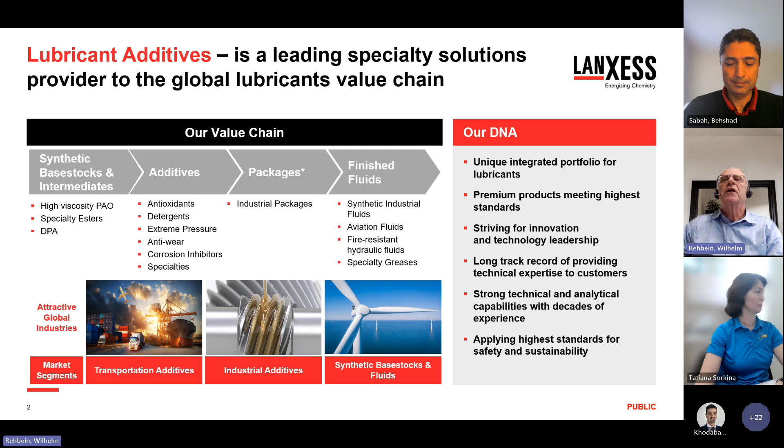These include finished fluids for aviation, fire-resistant hydraulic fluids, and special calcium sulfonate complex greases. All these premium products meet the highest standards, and there's also excellent technical support for customers.

So the plan of Lanxess as an entire company is to become climate neutral in its Scope 1 and Scope 2 emissions by 2040. Actually, these emissions have already been reduced by more than 60% compared to 2004. It is also planned to reduce the Scope 3 emissions continuously and to become net zero in that by 2050.

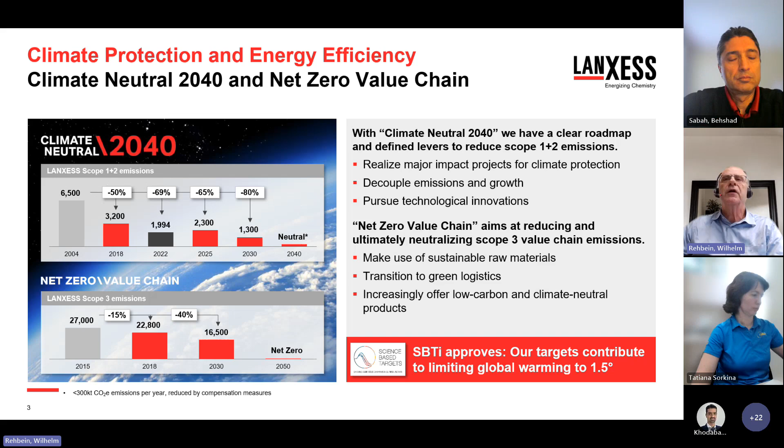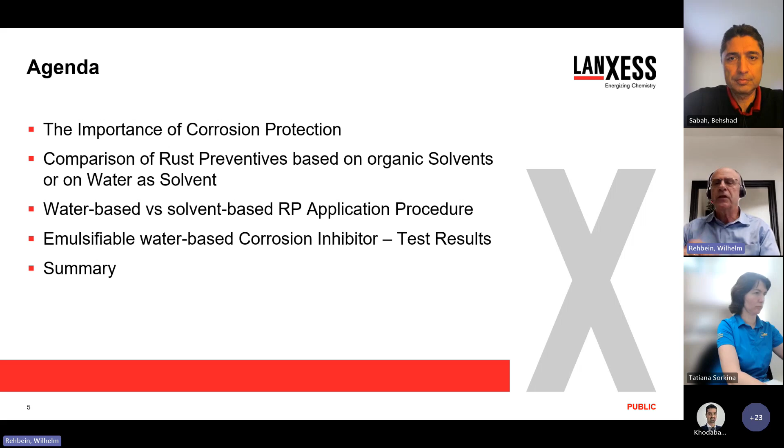So far for the introduction. I will now go to my first presentation, which has the title: Rust Preventives Based on Water as Solvent - Challenges and Advantages. I will start with an explanation of the importance of corrosion protection, then compare the advantages and disadvantages of using organic solvents versus just water as a solvent for rust preventives. This is followed by a description of the application procedures of both types of RPs, and I will also show the test results of an emulsifiable water-based corrosion inhibitor. Finally, I will come to a summary.

Corrosion protection is a quite important topic because corrosion actually generates more damage than fatigue. There's a study from 2016 that estimates the annual global cost of corrosion at approximately 2.5 trillion US dollars, which is approximately 3.4% of the global gross domestic product. According to another study, the direct costs of damage caused by corrosion just in the US were 276 billion US dollars in 2006.

And these are only the direct costs. Indirect costs, like loss of productivity, downtime of production facilities, and so on, are at least as high as the direct costs. So within the last 3 to 4 decades, supply chains became more complex, transport routes became longer, and transport volumes increased drastically.

Particularly for the manufacturing industry, corrosion during transport or storage of semi-finished parts like bars, slugs, or blanks, and of finished parts, has become a real challenge. Corrosion occurs due to bad weather conditions or changing climates during overland transport, but also by seawater impact during maritime transportation, or just by high-humidity storage conditions. The temporary corrosion protection of parts during transportation or storage is the typical application of rust preventives.

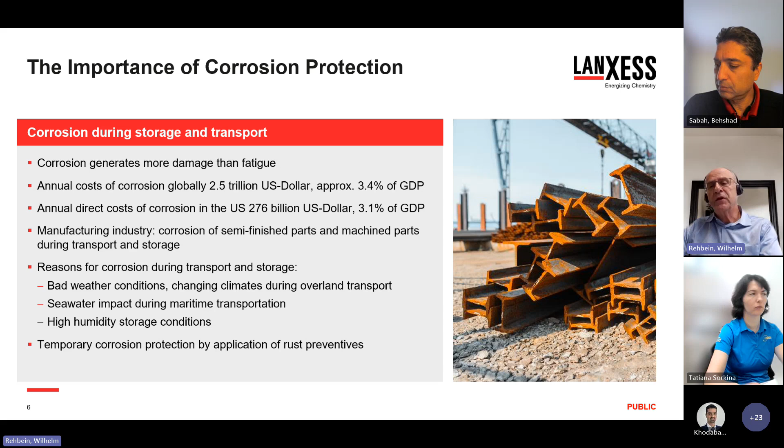Many rust preventives were in the past, and still are, based on organic solvents. This technique is quite common since long times. Advantages are: the application of this kind of rust preventive is a very established process, and drying times are usually short.

After removal, the rust preventives are very easy to dispose. They can just be burned. And the formulations are not very complex.

But these organic solvents, like white spirits, are volatile organic compounds, so-called VOCs. They act as a greenhouse gas and contribute to global warming. In reaction with nitric oxides and sunlight, they form ground-level ozone, which is a harmful air pollutant. And many VOCs are harmful by themselves and can cause health issues for the workers.

There are already restrictions for the use or emission of VOCs in many countries, like the US, Canada, the European Union, Australia, or Japan. So it's necessary to install an exhaust gas treatment like an afterburning system to eliminate the emitted solvent vapors.

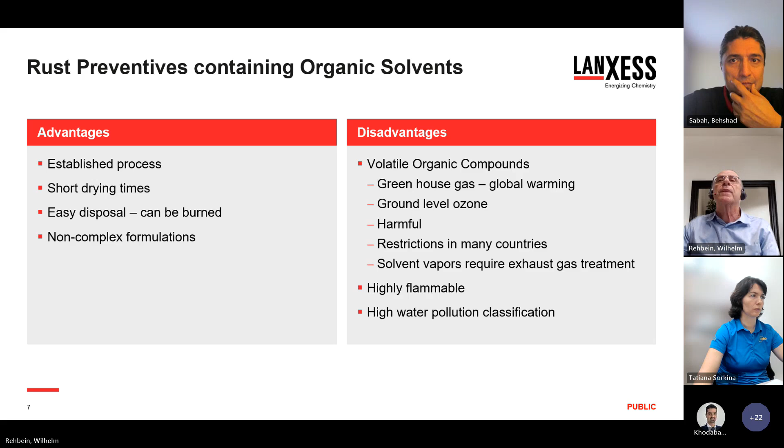But what if just using water as a solvent? There would be no VOC release because there are simply no volatile organic compounds in the formulation, and therefore also no exhaust gas treatment necessary.

The formulation, the rust preventive, would be not flammable, and usually it would have a lower water pollution class. The quantity of material that needs to be transported or stored is also lower because 70 to 80% of the finished rust preventive is just water, which is usually available in every manufacturing site. And the disposal is still as easy as for other used lubricants.

On the other hand, drying times might be longer, and because it's a new technology, some changes might be necessary in the application process.

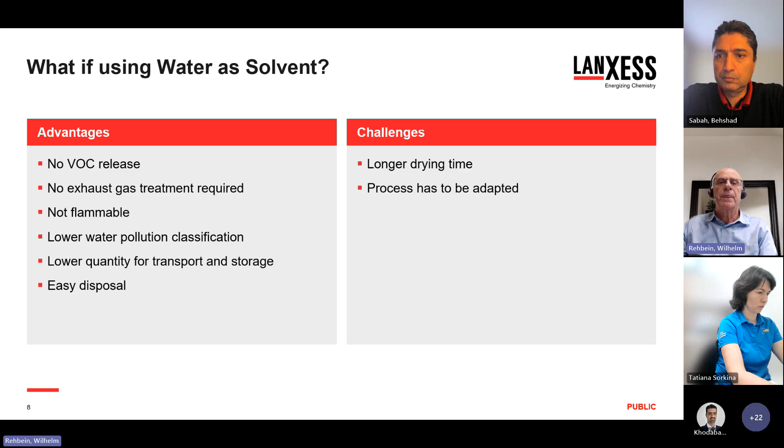This chart is a comparison of the application procedures of solvent-based or water-based rust preventives. It includes all the steps from the manufacturing of the part to the cleaning process, the application of the rust preventive, the transport and storage stage, and the removal of the rust preventive for assembling the part.

As you can see, for the solvent-based technology, there's always an exhaust gas treatment necessary during the cleaning of the parts, the application of the rust preventive, and also when the RP dries on the surface of the parts. With a water-based rust preventive technology, there is no need for an exhaust gas treatment because the only substance that evaporates is water. On the other hand, warming up the parts accelerates the drying process.

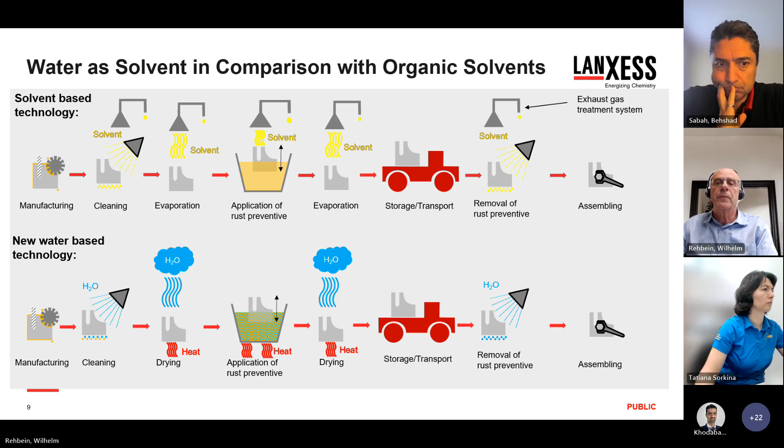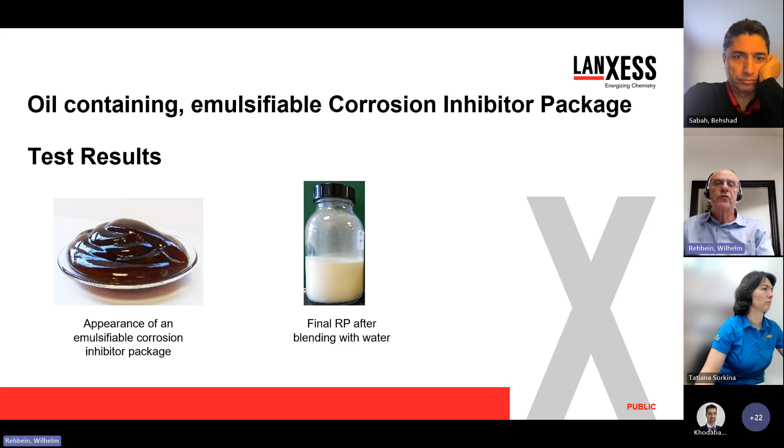The following test results were achieved with a water-based emulsion of a corrosion inhibitor package that we emulsified in a concentration of 10 or 20% in water.

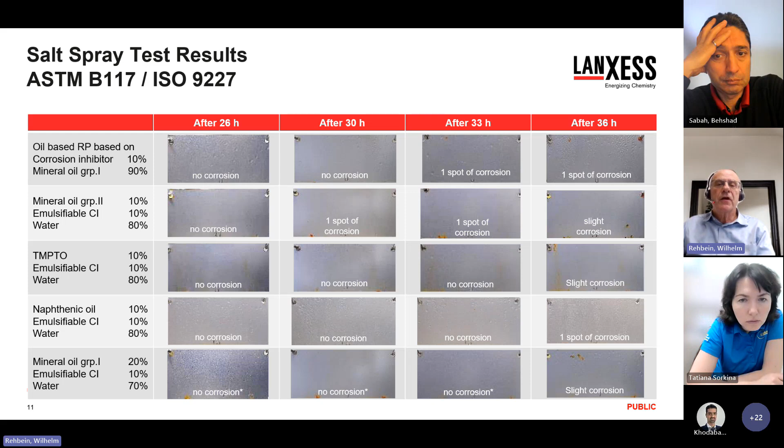All these formulations were diluted in water. And as you can see, the anti-corrosion performance of these water-based emulsions is at least on the same level as the oil-based rust preventive.

Additionally, we tested the emulsifiable corrosion inhibitor in a condensation climate with alternating humidity and air temperature. In this test, which is according to ISO 6270-2, one cycle consists of 8 hours at 40 degrees Celsius and 100% relative humidity, followed by 16 hours at ambient temperature and ambient humidity. So one cycle is finally 1 day.

That test was stopped when the surface of the steel sheets was covered with corrosion at a level of 5%. As you can see, the emulsion of 10% corrosion inhibitor, 10% mineral oil, after drying, lasted on the steel sheets for 178 cycles or days until the corrosion limit of 5% was reached. And with 10% corrosion inhibitor and 20% mineral oil, it took even 220 days until the test was stopped.

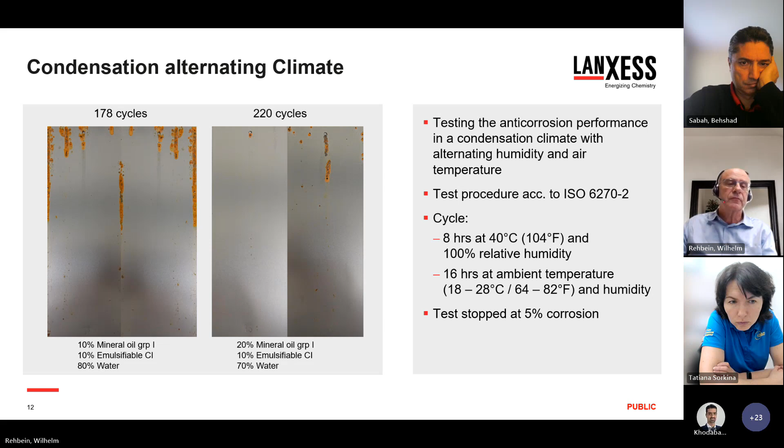Of course, excuse me, just a moment, please.

Of course, the drying time of water is longer than the drying time of organic solvents that have a low flash point. However, we compared the drying time of solvent-based rust preventives with the drying time of the rust preventive emulsion that also contains some siccatives.

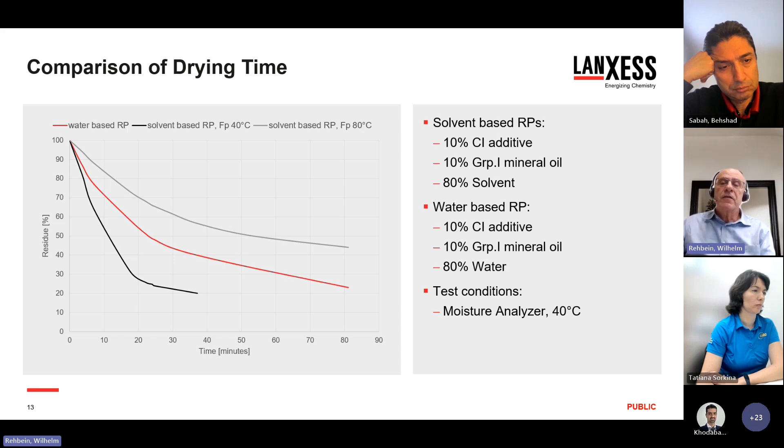Compared to a solvent-based rust preventive with a flash point of 40 degrees, this is the black line, the drying time of the water-based rust preventive, the red line, was significantly longer. But on the other hand, there is the low flash point of the rust preventive, which causes a danger of ignition, just 40 degrees Celsius.

But if we compare the water-based rust preventive with one that is based on solvent, which has a flash point of 80 degrees Celsius, the water-based formulation dries much faster.

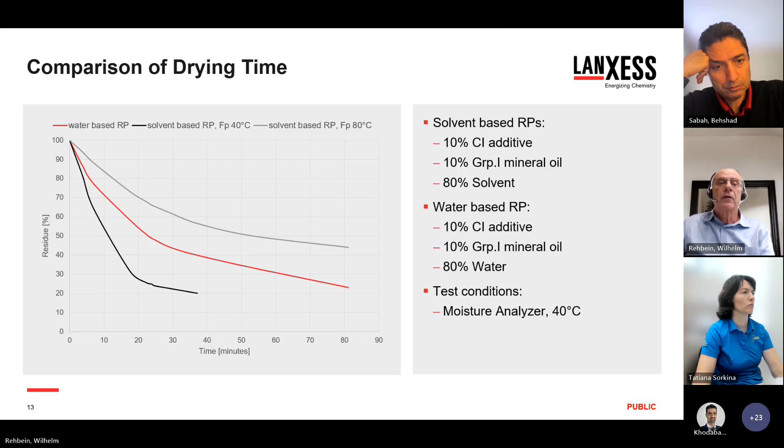After the application of the rust preventive, it's also important that the dried film can be easily removed by suitable cleaners. We tested how easy or difficult the film can be removed by two different types of water-based cleaners: one according to the industrial standard VDA 230-201, and the other a commercially available industrial cleaner for ferrous metals.

The sheets covered with a dry rust preventive film were dipped for 3 minutes in the different cleaner solutions at a temperature of 60 degrees Celsius. After that, we rinsed them with tap water for 30 seconds. For better verification of the cleaning test result, we conditioned the clean steel plates by dipping them into a copper sulfate solution, so all the surface areas on the steel sheets which were perfectly clean were covered with a thin copper coating.

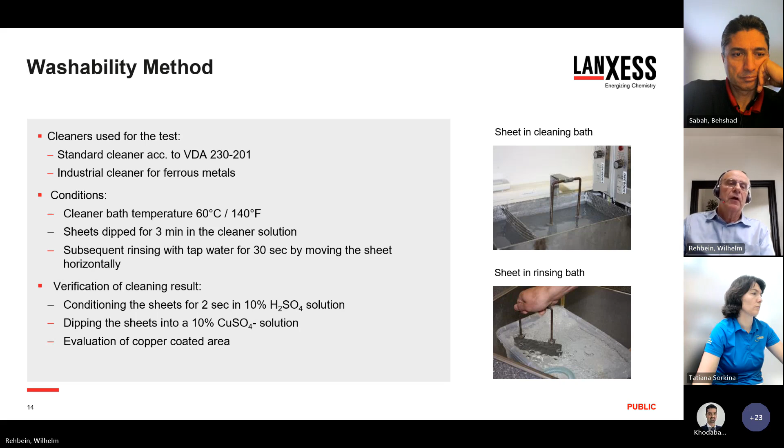As you can see on these photos, with both rust preventive formulations containing 10% corrosion inhibitor and 10 or 20% mineral oil and 80 or 70% water, with the VDA standard cleaner as well as with a conventional cleaner for ferrous metals, the results were excellent, and the clean surface area on the steel sheets was 100%.

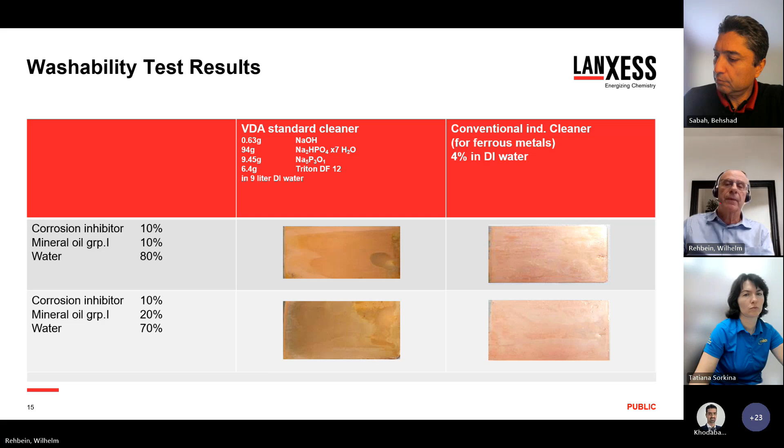So the summary and conclusion for the first presentation: rust preventives based on water can, in our opinion, be a great alternative to meet today's environmental requirements. The new emulsifiable corrosion inhibitor technology offers excellent performance for long-term temporary corrosion protection. There are no emissions of VOCs, and the formulation also works without heavy metals like barium. The formulated rust preventive is not flammable because of its high water content, and the salt spray protection and condensation alternating climate protection times are comparable to oil-based rust preventives.

We also found that the stability of the prepared emulsion is excellent even at high water hardness. And finally, as I could demonstrate, the protective film of this water-based rust preventive is easy to remove using suitable water-based cleaners.

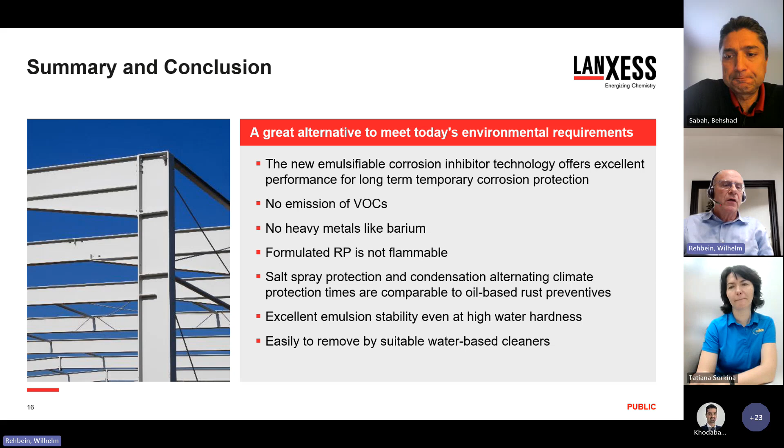I will now come to my second presentation. The title of the second presentation is EP Additives with Improved Sustainability for Heavy Duty Metalworking Processes. So completely different, but I think both topics are somehow related to metalworking.

I will now start with a general introduction into the function of EP additives, followed by detailed information about sulfur carriers and a comparison of the technical and health and safety aspects of sulfur carriers and chlorinated paraffins, both of which work as EP additives for metalworking fluids. In the second part, I will show tribological test results of EP additive containing neat oil metalworking fluid formulations, as well as waterborne formulations. Finally, I will again come to a summary and conclusions.

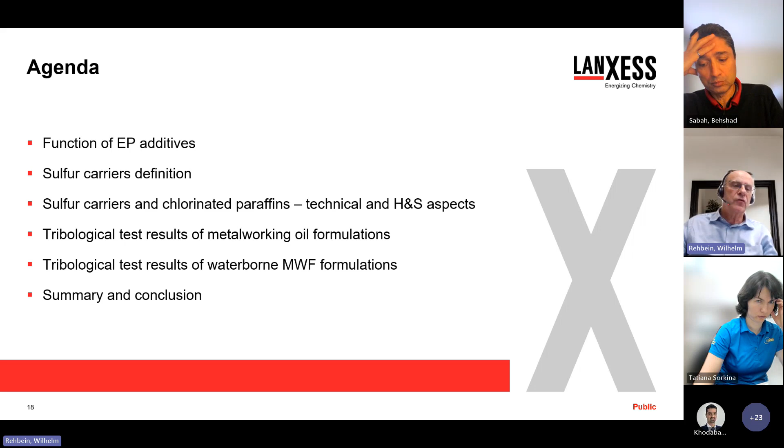Chlorinated paraffins and sulfur carriers are both EP additives that are used in lubricants and metalworking fluids quite commonly to prevent adhesive wear, which is also called galling or cold welding.

But how do EP additives work? According to the common theory, in a first step they physically adsorb on metal surfaces with their polar centers, and by this they are already forming a kind of friction reducing layer. With increased mechanical stress, usually followed by thermal stress, they chemically react with the metal surfaces, forming protective layers that are less shear stable than the metal structure itself, and by this they prevent the metal surfaces from galling or cold welding.

Sulfurized esters and triglycerides undergo a kind of intermediate step of so-called chemisorption, in which they also work as lubricity and anti-wear additives.

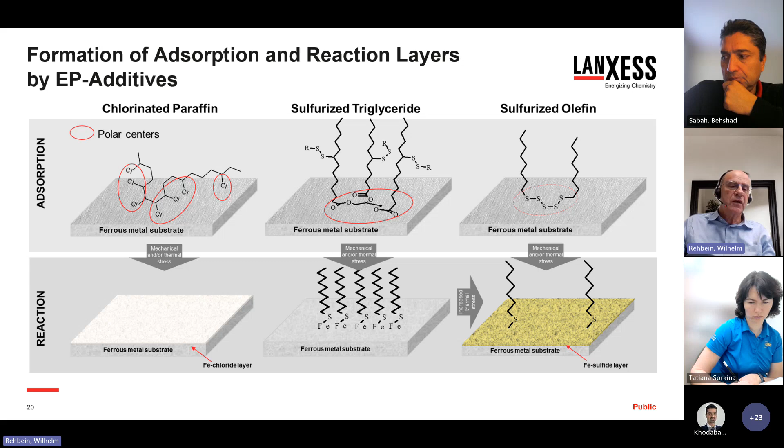So what are sulfur carriers? Sulfur carriers are sulfur-containing organic compounds made from unsaturated raw materials like olefins or unsaturated natural oils or synthetic esters. They contain 2 to 5 sulfur atoms, forming a kind of connection or chain or bridge between the olefin or ester parts of the molecules.

They have polar centers, as I already showed on the previous slide, and with these polar centers, which can be oxygen atoms or the sulfur atoms itself, they can physically adsorb on metal surfaces. By this, they make sulfur oil soluble and able to form protective layers, which protect metal surfaces from adhesive wear or galling. So they work perfectly as EP additives in metalworking processes and are excellent replacements for chlorinated paraffins.

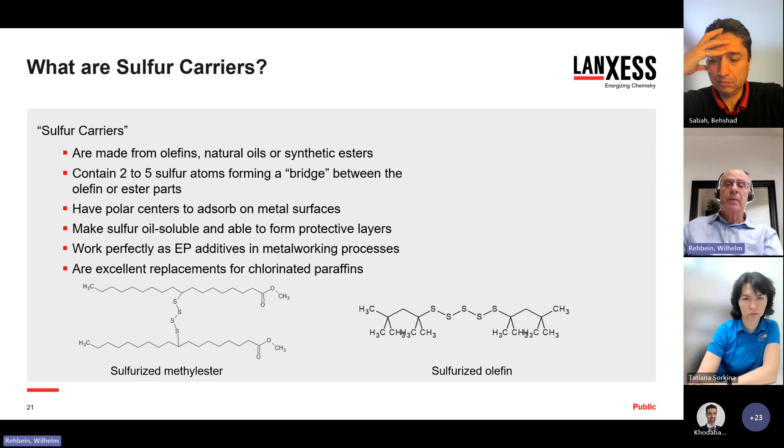This is how sulfur carriers are produced. Raw materials for the sulfurization process are vegetable oils like soybean, canola, or sunflower, respectively their methyl esters, but also animal fats or oils like beef tallow or lard can be used, or olefins from crude oil refining are also suitable raw materials for the sulfur carriers.

In a reaction vessel, sulfur and H2S are added, as well as catalysts and stabilizers, and the reaction products are sulfur carriers of light color and low odor.

Can you still see my presentation? I got one comment from Yusuf that he cannot, but I can. Everybody can see the presentation? Ayman, do you see that? Yeah, okay, okay, great. Okay, cool. Okay, so I can continue.

So I will now come to a comparison of the technical aspects of chlorinated paraffins and sulfur carriers. Chlorinated paraffins are definitely effective EP additives at low machining speeds.

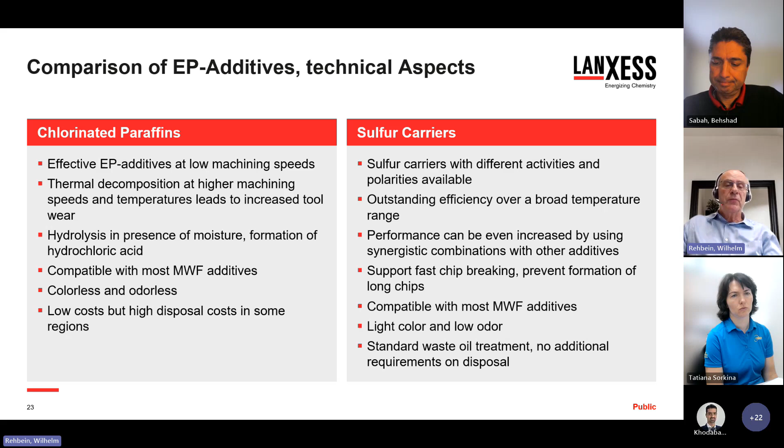Coming to the health and safety aspects, the short-chain chlorinated paraffins are already banned in many countries because they are persistent in the environment, they are bioaccumulative, and suspected to cause cancer.

There are intentions to ban or restrict the use of medium-chain chlorinated paraffins, the so-called MCCPs, for example by the European Chemicals Agency, the Japanese and South Korean Ministries of Environment, and by the United Nations Environment Programme, the so-called Stockholm Convention.

As far as we understand, there have also been discussions about a ban of medium and long chain chlorinated paraffins in the United States, and according to our information, these discussions are still ongoing.

Finally, chlorinated paraffins are categorized according to the Globally Harmonized System of Classification and Labeling of Chemicals as very toxic to aquatic life with long-lasting effects.

Sulfur carriers, on the other hand, do not show any kind of hazard classification, and many sulfur carriers are based on renewable raw materials like vegetable oils. Some are already 100% biodegradable and absolutely non-toxic to aquatic organisms.

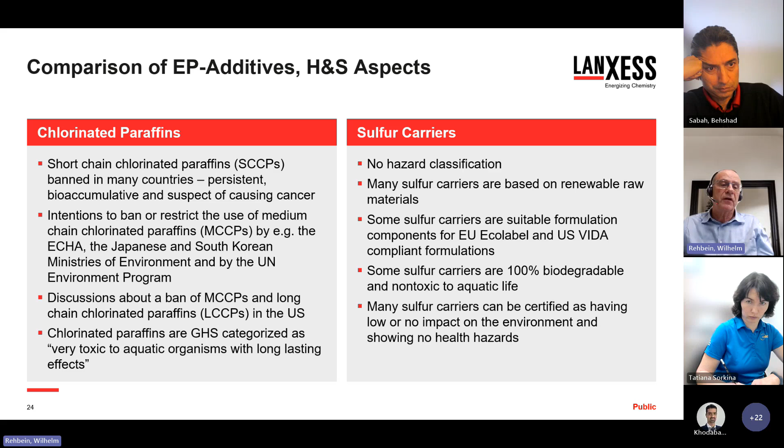Now I will come to some tribological test results, first with the neat oil formulations. We use the tapping torque test to evaluate the performance of the different EP additives. This test uses a real thread cutting or thread forming process in which the torque is recorded and used for the evaluation of the different metalworking fluid formulations.

It can be done with many different workpiece materials and also different tools. The test results are very well transferable to other cutting or forming processes. So the torque is recorded and used for the evaluation of the tested formulations. That means a lower torque indicates lower energy consumption in the process, and also results in lower tool wear.

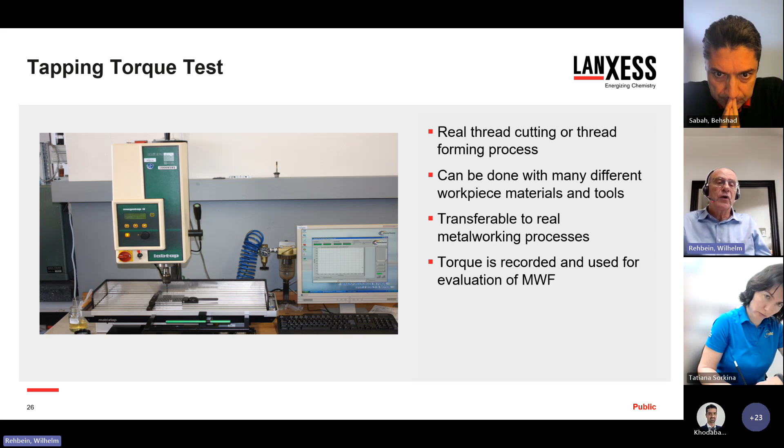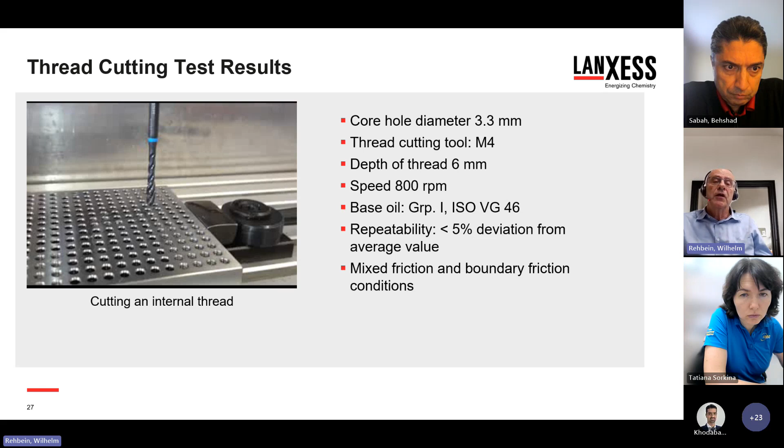I would like to start with our thread cutting test results. We used parameters like the diameter of the core holes, which was always 3.3 millimeters. We used an M4 thread cutting tool. The depth of the thread was 6 millimeters. The speed was 800 RPM, and we always used the Group 1 ISO VG 46 base oil for our tests.

First of all, we did the thread cutting in AISI 316 stainless steel, because contrary to normal steel, the surface of stainless steel is nearly completely covered with metal oxides, which makes it quite difficult for EP additives to interact with this surface, and it's also difficult for metalworking fluids to perform well with stainless steels.

We first used a non-coated tool for the thread cutting process. So we started with running the test with different sulfurized triglycerides with similar chemical structure and similar viscosity to evaluate the influence of the sulfur content and the sulfur activity, which is actually quite high.

As you can see, with 10% of the inactive sulfurized triglyceride, adhesion, respectively cold welding, was detected at a depth of approximately 3.5 millimeters.

With 10% of a medium active sulfurized triglyceride with nearly the same kinematic viscosity, torque was lower, but there was still a tendency for material adhesion towards the end of the cut. Only with the active sulfurized triglyceride was the cut performed without any adhesion effect and with a comparatively low torque.

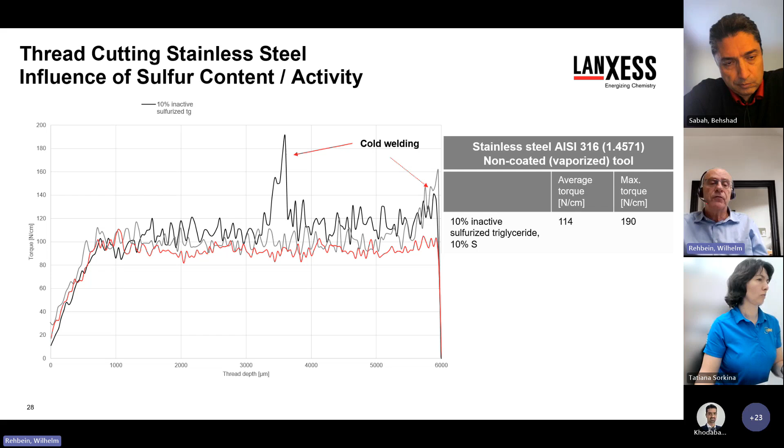Because the highly active sulfurized triglyceride showed the lowest torque, we additionally tested a sulfurized ester with almost similar sulfur content but lower kinematic viscosity, and as you can see, in this test with stainless steel, there was no significant difference.

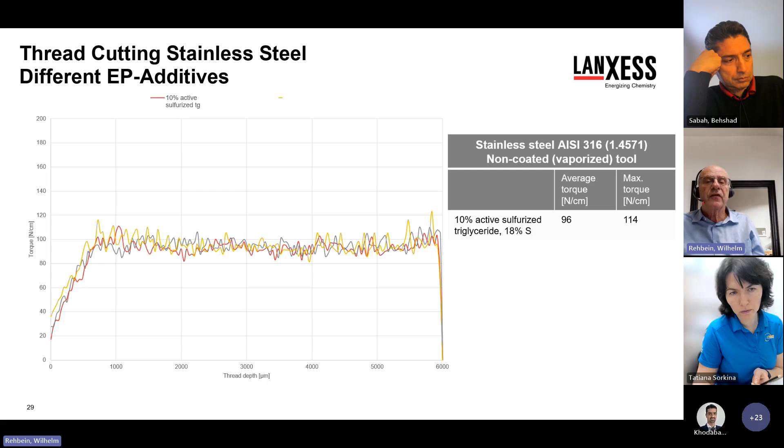We also tested a formulation containing 10% of a medium chain chlorinated paraffin, which contained 50% chlorine. When we compare the torque of the chlorinated paraffin containing formulation with the sulfur-based EP additives, we see that the average torque is quite similar. But the torque curves of the sulfur carriers are smoother and with fewer peaks in the records than for the chlorinated paraffin.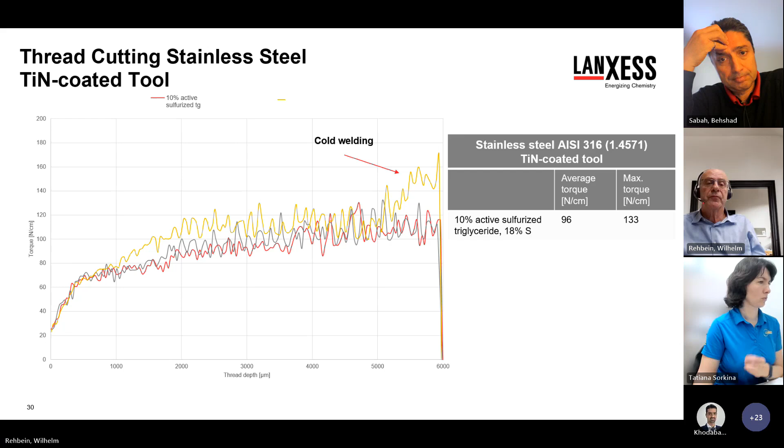Additionally, we did some thread forming tests. In thread forming, the internal structure of the metal is not destroyed or cut, but just deformed. The material is compressed to the walls of the thread, so no chips are produced. Formed threads typically have a higher fatigue strength and are more durable than threads produced by cutting.

In this test series, the core hole diameter was 3.7 millimeter. It was also an M4 cutting tool, but it was titanium aluminum nitride coated. The depth of the thread was 8 millimeter. The machining speed, again, was 800 RPM, and we used the same base oil as for the thread cutting tests.

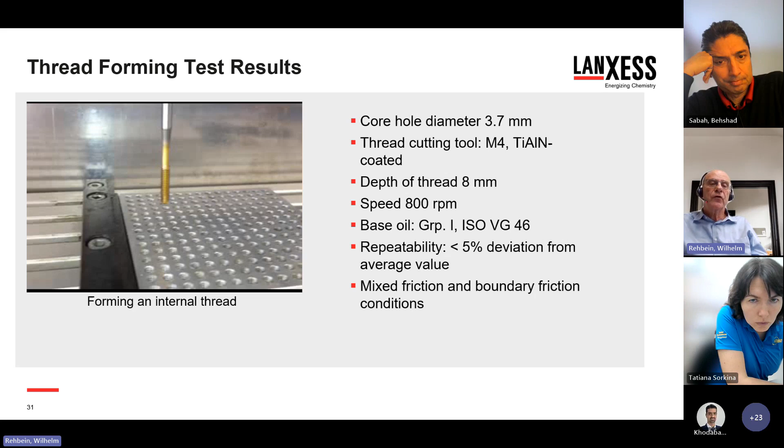So again, we started with stainless steel and with a 10% medium chain chlorinated paraffin formulation. Compared with this formulation, the formulation containing 10% sulfurized ester showed a slightly lower average torque, but a higher maximum torque. This is probably caused by the lower viscosity and the lower lubricity of the sulfurized ester. But then we ran the test with 10% of the active sulfurized triglyceride, and due to the higher polarity of its molecular structure, the torque was significantly lower, and also much lower than for the chlorinated paraffin.

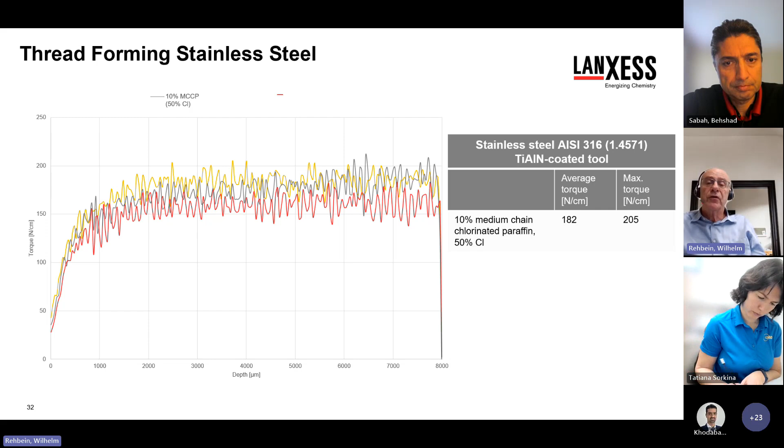We did the thread forming also in S960QL high strength steel. The yield strength and tensile strength of S960QL are similar to ultra high strength steels that are commonly used in the car industry, so therefore they are quite difficult to machine by forming processes.

When running the test with this steel, the medium chain chlorinated paraffin showed a comparatively high torque, and the curve, as you can see, is quite uneven. With the sulfurized ester, and even more with the sulfurized triglyceride at the same treat rate, the torques are much lower, which means the forming process will be less energy consuming and also cause lower tool wear.

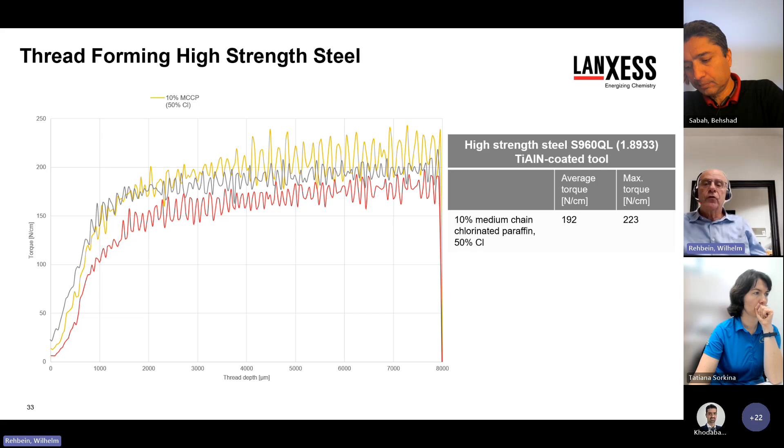But because the tapping torque test does not give a direct indication about tool wear, we additionally used the 4-ball wear test to evaluate the influence of the EP additives on wear in this kind of mixed lubrication regime. We ran the test with the standard ball bearing steel, as well as with stainless steel balls. The test parameters were according to ASTM D4172B, but also according to DIN 51350-3.

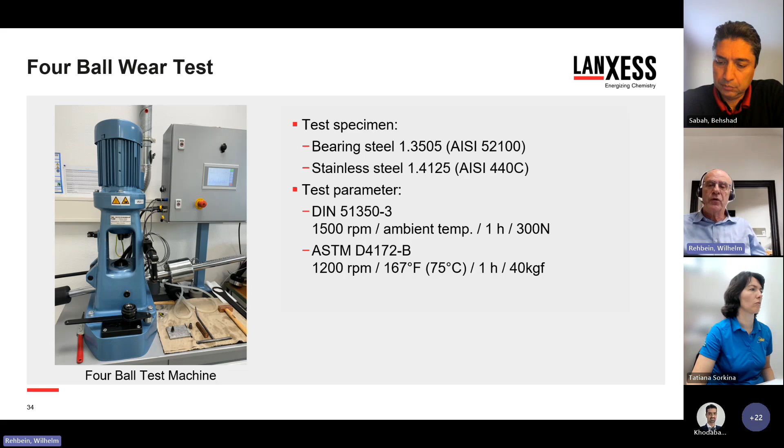When running the test according to the DIN standard, we found the lowest wear scar diameter on bearing steel with the inactive sulfurized triglyceride, which is 0.72. With the more active sulfur carriers, the wear scar diameter was slightly higher, larger.

With stainless steel, the gray bars, the effect was reversed, so the wear was reduced with increasing sulfur and active sulfur concentration. But in any case, the wear was significantly lower when compared to 10% or even to 20% medium chain chlorinated paraffin.

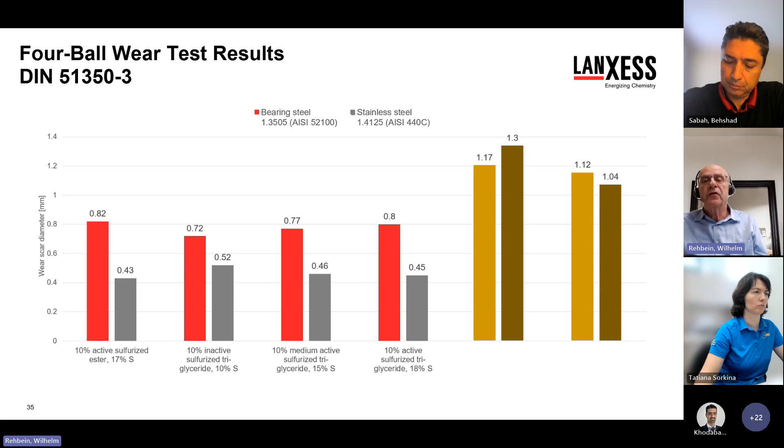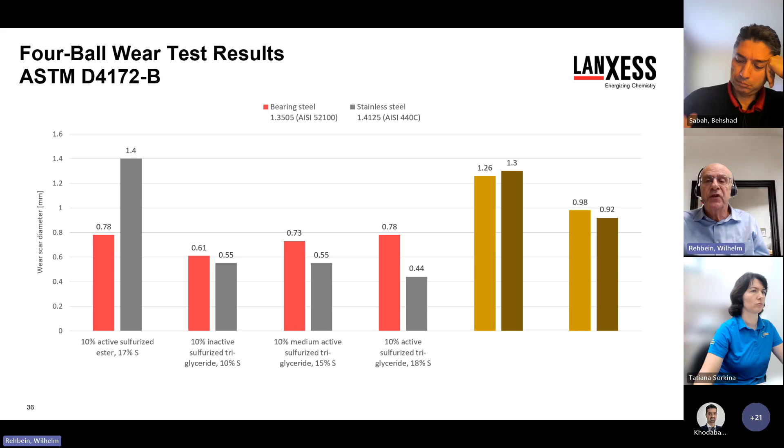When the test was done using ASTM D4172 parameters, the active sulfurized ester showed high wear on stainless steel balls, probably due to its lower lubricity properties. But the sulfurized triglycerides again showed very low wear on bearing steel and also on stainless steel, particularly when compared to 10% or 20% chlorinated paraffin containing formulations.

But EP additives are not only commonly used in neat oil formulations, but are also important components for metalworking fluid emulsions that are used for heavy-duty metalworking processes. All these different sulfur carriers can be quite easily emulsified and used as EP additives in soluble oils and in semi-synthetic emulsifiable metalworking fluid formulations.

For the evaluation of the performance of metalworking fluid emulsions, we used the so-called Reichert wear test. In this test, a steel cylinder is pressed against a rotating steel ring with a pressing force of 300 Newton, and during the test, the ring rotates in a container filled with a metalworking fluid emulsion, so there is a continuous supply of metalworking fluid to the contact zone. We can say this test simulates the tribological conditions of a turning process.

Evaluation parameters are the travel distance of the noise generation. You can hear the noise very strong at the beginning of the test, and then after some time or some distance, the noise becomes much lower. This point indicates the formation of a protective EP film on the metal surface, so a shorter noise travel distance is the better value. Also, the size of the wear scar area on the cylinder after the test is used for evaluation of the different additives, and again, a smaller wear scar area is the better result.

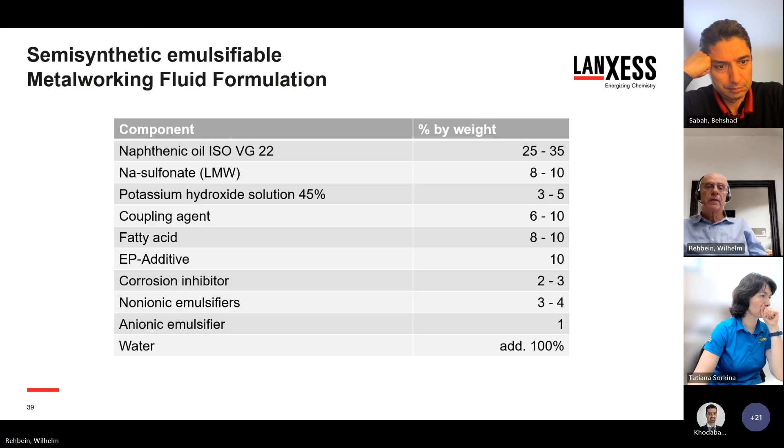With increasing sulfur content and activity, the duration of the noise generation becomes shorter. You can see this if you compare the sulfurized triglyceride with 10% sulfur content with the other

triglycerides containing 15 or 18% sulfur. This is a clear indication for faster formation of the protective EP layer. Compared to a long-chain chlorinated paraffin that we tested as well, the performance of the sulfurized triglycerides, the active ones, is significantly better.

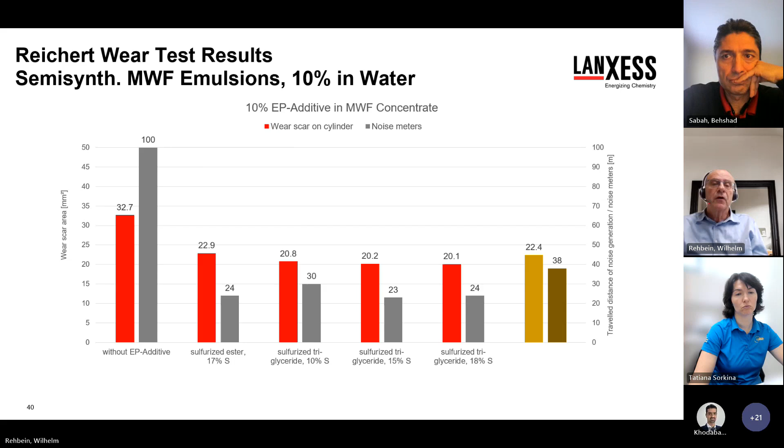Finally, we can conclude that this presentation demonstrates that it is possible to formulate neat oil and also water-miscible emulsifiable metalworking fluids with excellent performance by using EP additives based on sulfurized renewable raw materials like vegetable oils or vegetable oil methyl esters. All the sulfur carriers that I showed in this test can be certified as based on renewable raw materials for more than 50%.

The remaining percentage is just sulfur. They have a quite low impact on the environment. They are not labeled as hazardous to humans or to the environment, and they actually meet the requirements of the so-called LuSC list

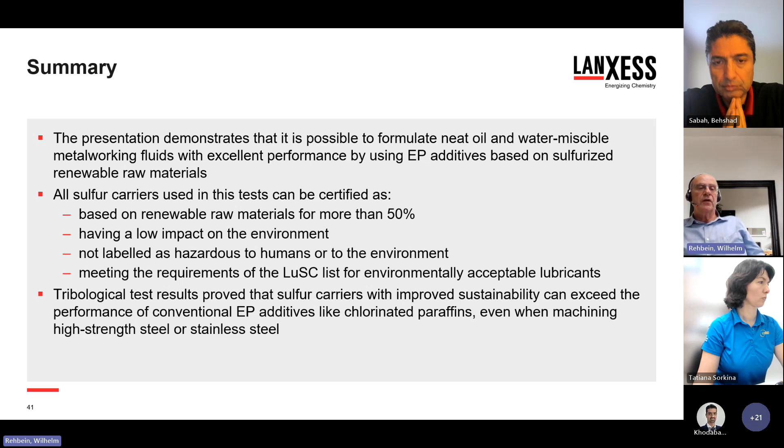for environmentally acceptable lubricants. I think the tribological test results show that sulfur carriers with improved sustainability can even exceed the performance of conventional EP additives like chlorinated paraffins, even when machining high-strength steel or stainless steels.

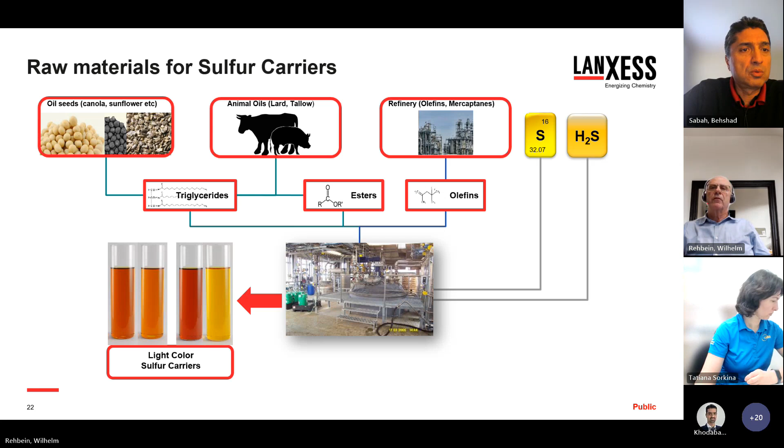And then I have a question myself, about this ring and cylinder test, the Reichert test that you showed. Can you share the detail of the apparatus and the procedure with us? Yes, in principle. This is a test which is maybe quite commonly used in Europe, but not in the Americas. But this is a test that we often use to show EP properties of water-mixed or waterborne metalworking fluids. So in principle, a steel cylinder, which is made of AISI 52100 ball bearing steel, is pressed against a rotating ring.

And the duration of the test is just the ring rotates for a length of 100 meters. So it's not measured by time, but by the rotated surface in meters. After the end of the test, after the 100 meters, the cylinder and the ring are dismantled, and there is a wear scar on the cylinder. This wear scar is measured - the area is measured - and the smaller the area of the wear scar, the better the performance of the lubricant emulsion. So in that case, it's quite similar to a four-ball wear test, where also the area or the diameter of the wear scar is measured.